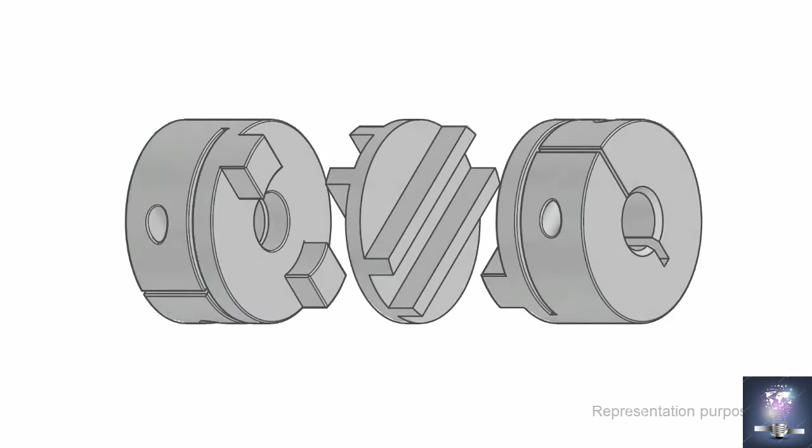In this video, I will make an Oldham coupling in AutoCAD 3D. This coupling is generally used for connecting two non-collinear shafts. So if two shafts are not collinear, but are parallel to each other, this coupling is generally used. Moving on to the 3D drawing, I'll start with a simple circle.

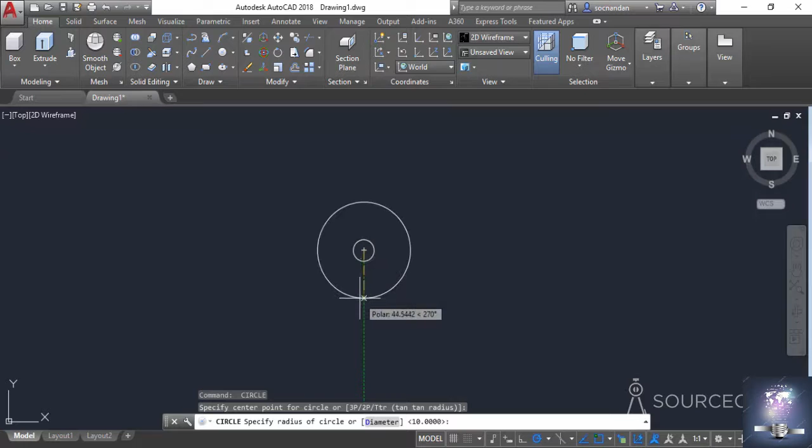Go to the draw panel and select the circle tool. Click anywhere in the drawing area to start the circle and enter the radius. I'll type 10 as the radius and press enter. Now press enter again to repeat the command, select the same center and make another circle with radius of 35 units, then press enter again.

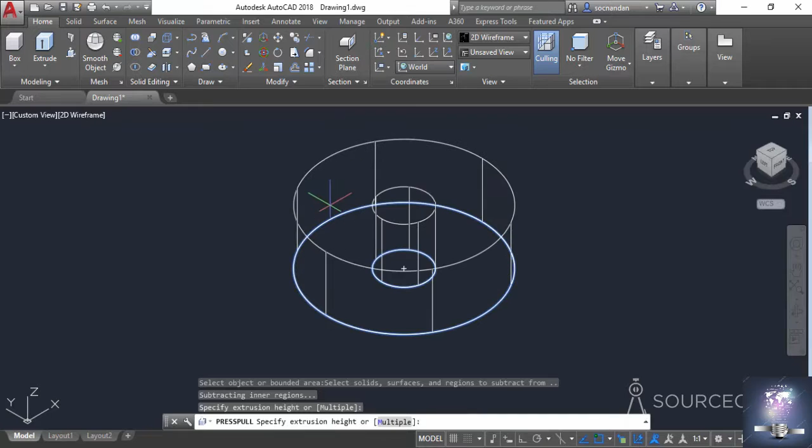Now I'll move to the 3D plane. For that, I'll click on this home icon close to the view cube, and go to the press pull tool on the modeling panel. Click in between these two concentric circles and enter a height of 36 units, then press enter.

Now press escape, and I'll change the visual style to see this more clearly. I'll go to the view panel, click on the drop down and select shades of gray. This will make it quite visible.

Now I'll go to the top view once again, zoom out and make a rectangle. I'll go to rectangle, click anywhere outside this 3D geometry, and type @ on the command line. Now enter the length of this rectangle, which is 16 in this case, comma width. I'll use a width or height of 80 units and press enter. So here we have it.

Now I'll click on this and move it exactly onto this 3D geometry. For that, I'll select the move tool and click on the geometric center. I'll track this point, then track this midpoint, click at this point, and move it onto the center of this geometry here.

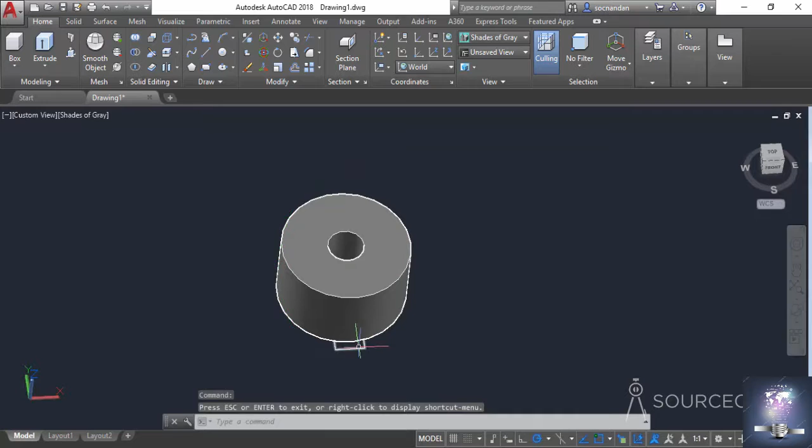Now let's orbit this drawing a little bit to see it clearly. Okay, so we have it here on the lower side. I'll click on it and move it upwards. Select the move tool, click on a point and move it upwards. Make sure this green tracking vector is visible, and when it is, enter a height of 36 units and press enter.

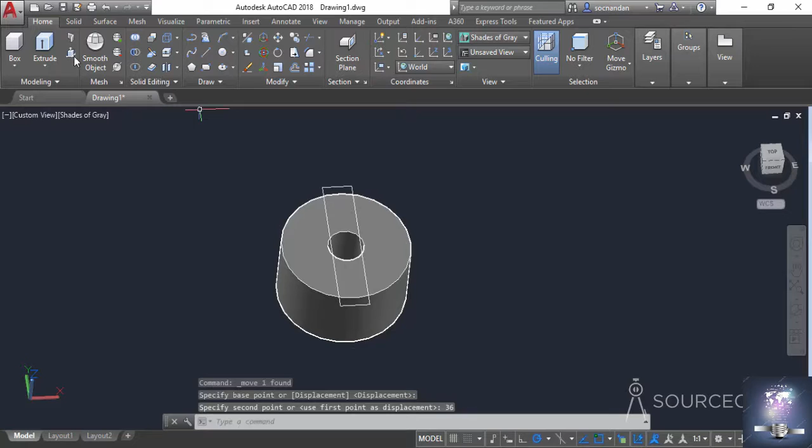Now go to the press pull tool again and select this area within this rectangle and the rest of the geometry. Enter a height of 10 units and press enter. Now repeat the process for this second part as well, enter 10 and press enter. Press enter again to exit the press pull tool.

Now I'll select the circle tool and click on this topmost center of the circle. Make another circle with radius of 20 units and press enter. Go to the extrude tool, select the circle you have made and press enter. The circle will extrude in the upward direction, but we want it in the downward direction, so type -10 and press enter. So here we have it.

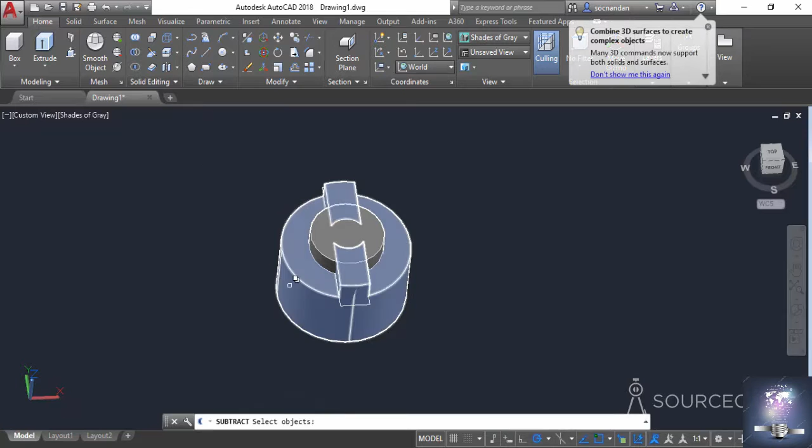Now we'll subtract this circle from the rest of the geometry. For that, I'll go to the subtract tool. Select this main geometry and press enter, then select this part and press enter again. And here we have it, the subtracted geometry as per our requirement.

Now we'll make another rectangle. I'll go to the rectangle tool, click anywhere in the drawing area, and type @ on the command line. Make it with a length of 70 units and a height of 80 units, then press enter. So here we have it.

Now click on this home icon and select the extrude tool. Select this rectangle, press enter, and enter a height of 1.6 units, then press enter.

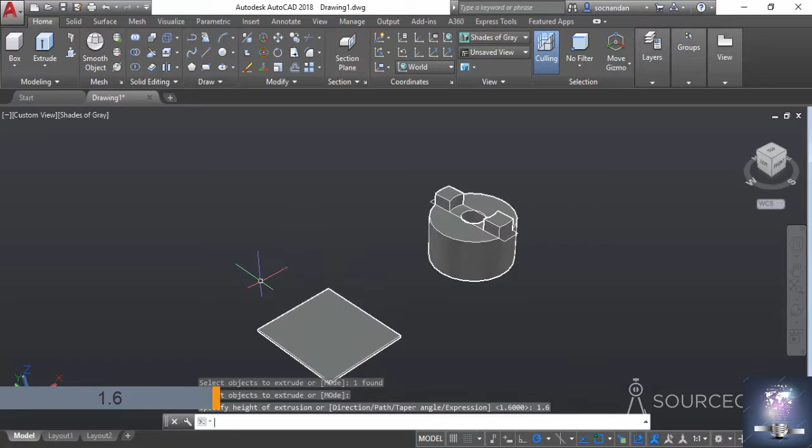Now we have this drawing in perspective view, which we don't want, so I'll change it to parallel by right clicking on the view cube. We'll move it upwards. I'll click on this front view and you'll see that this is currently on the bottom side of this geometry, but we want it on the upward side, so we'll move it a little bit upward.

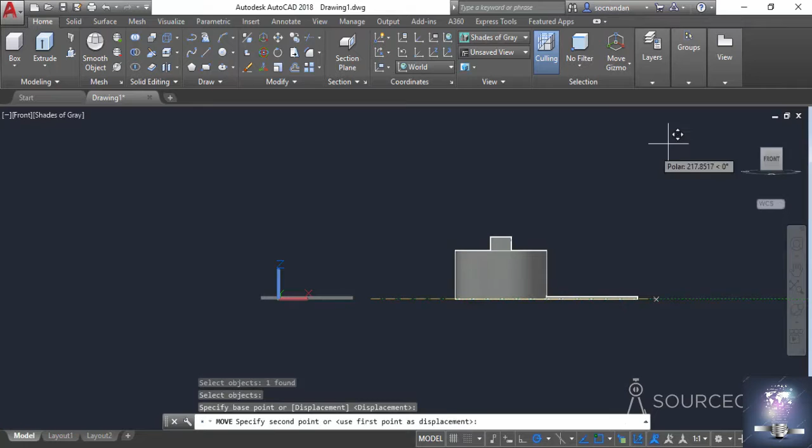For that, I'll select the move tool, select this rectangle, press enter, click on any point, and move it upwards, but we are not able to do that in this view. So I'll change the view by clicking on the home icon once again, and when the green tracking vector for the z-axis appears, enter the length, which is 26, and press enter.

Now once again click on this front view, and you can see that it has now moved upwards. I'll right click on the view cube and change it to parallel to see it more clearly.

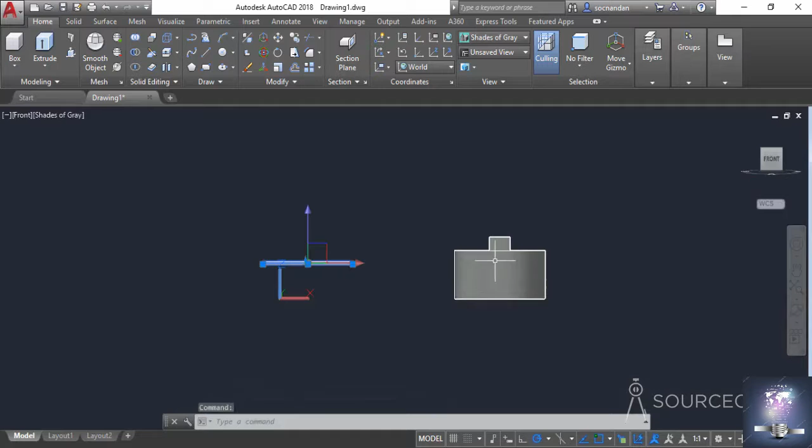Now we need to insert it inside this drawing. So select it, click on the move tool, click on this endpoint and move it so that it completely passes this center groove, and I'll click somewhere over here.

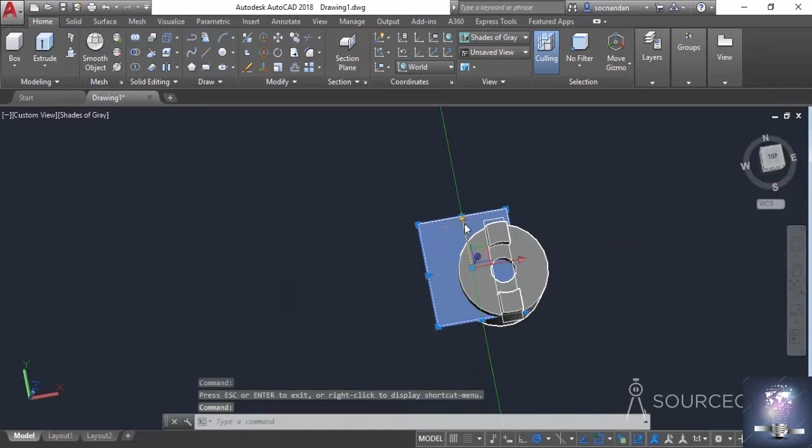Okay, now orbit the geometry, and we need to move this one a little bit towards the downward side. I'll select it, and using this gizmo I'll click on the green axis and move it a little bit downward. Now it is completely passing this cylinder. Now we can subtract the geometry.

I'll select the subtract tool, select the main cylinder, press enter, select the rectangular shape and press enter again. And here we have it. Okay, so one part is now complete. Now let's move to the other side of this shape.

So here we will add another groove. I'll click on the bottom view like this, and now I'll make another rectangle. For that I'll select the rectangle tool, click somewhere over here, and type 'at' on the command line, then enter a length of 70 units and a width of 1.6 units and press enter.

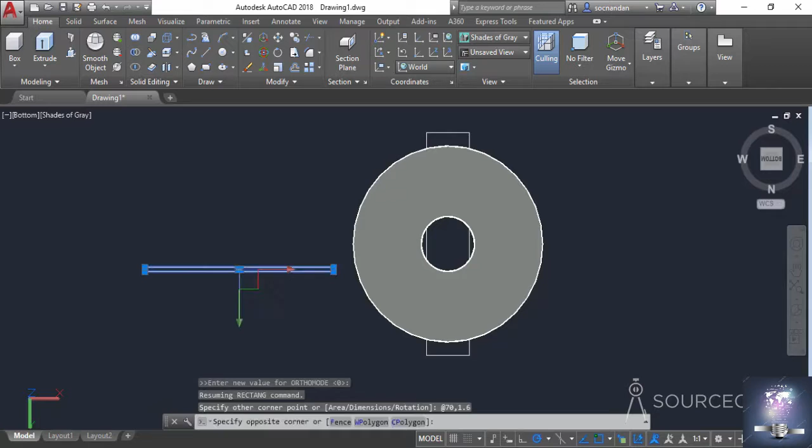Now I'll select this completely, select the move tool and move it to the center. So I'll click on this midpoint and move it to this center point. Now this is on top of this geometry, as you can see quite clearly.

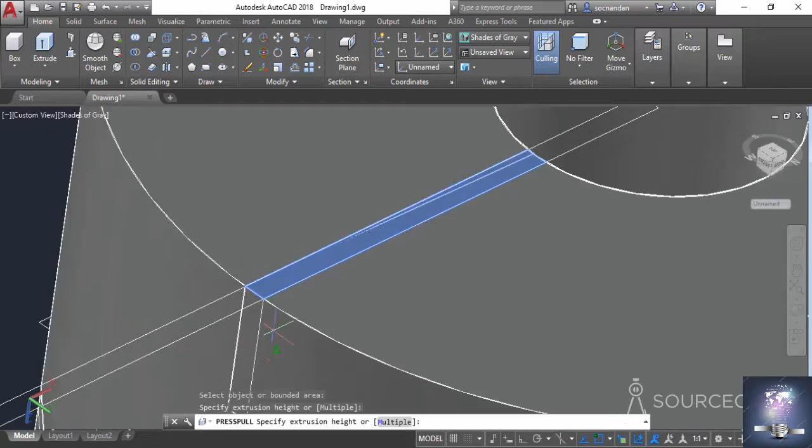Now select the press pull tool and click inside this groove, and move it in the downward direction and click on any point somewhere over here. You can click on this midpoint also, so that a groove is formed, and here we have it. The groove has been formed here.

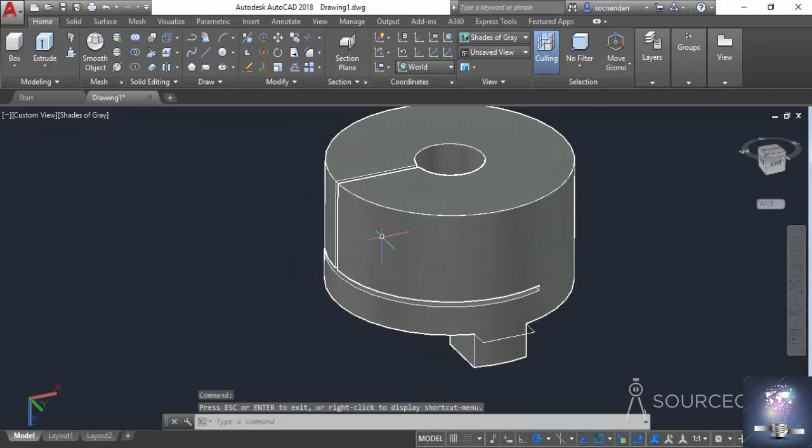Now you can remove this rectangle, it's no longer required. So we have our groove here as per our requirement. Now we need to add here the groove for our bolt.

I'll click on the back view, and here we need the bolt groove. So I'll click on the circle tool, but before that we need to change the UCS, as we are currently on the XZ plane on which we cannot make the drawing. I'll click on this coordinates panel and click on this flyout, select the view, and the coordinate will change to XY.

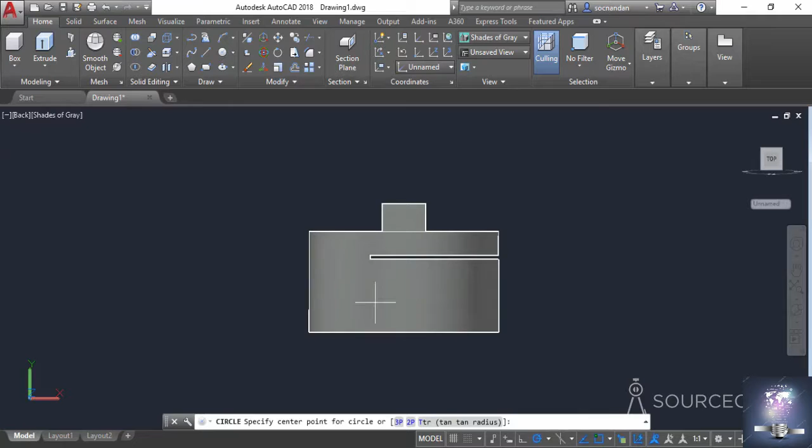Now click on circle, click somewhere over here, and make a circle with a radius of 4 units and press enter. So now the circle is not visible because it's made on another plane parallel to this one. I'll orbit this drawing, and here we have it.

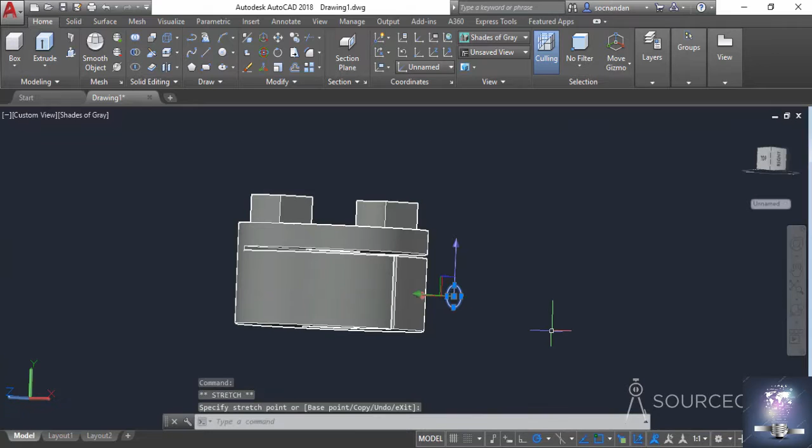So we need to move it. Just orbit the drawing a little bit. Now select the circle and, using this green grip, move it close to this geometry.

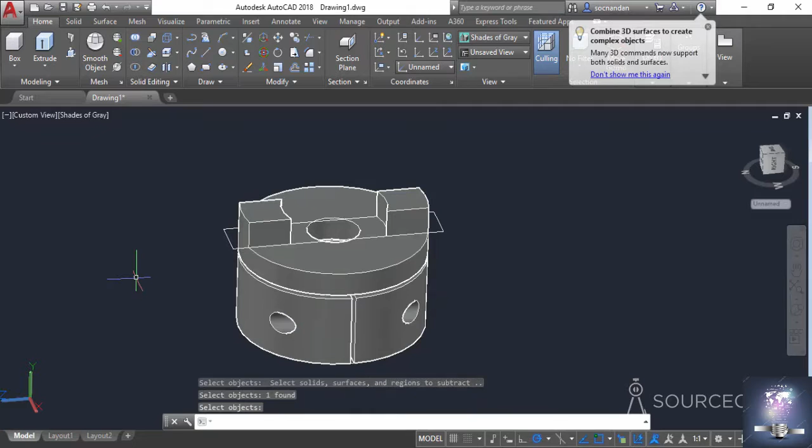Now we will go to this extrude tool, select the circle, press enter, and make a cylinder that completely passes through this geometry. Once again select the subtract tool, select the main geometry, press enter, select the cylinder, press enter again, and we have the required groove here.

So now we need to make another pair of this unit, but before that we'll add final details. The first detail we need to add is the chamfer on this side. For that I'll just remove this circle, this is no longer required.

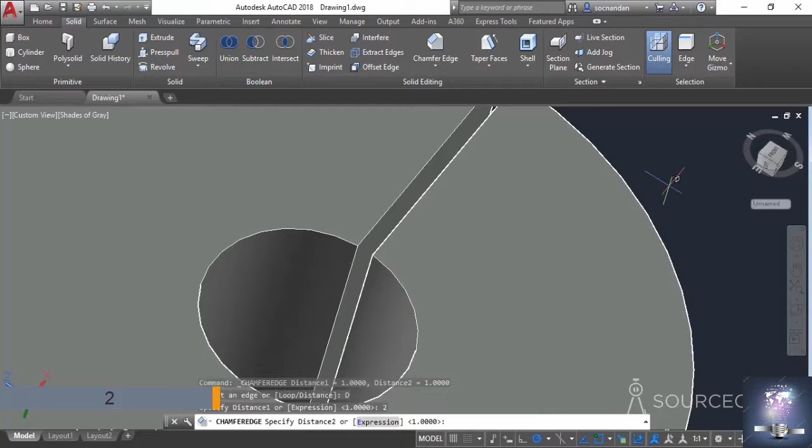Now go to Solid, and from this solid editing panel, select the chamfer tool. Click on distance and enter a distance of 2 units. Press enter and enter 2 units and press enter again. Now click on this corner and press enter. Okay, so here we have it.

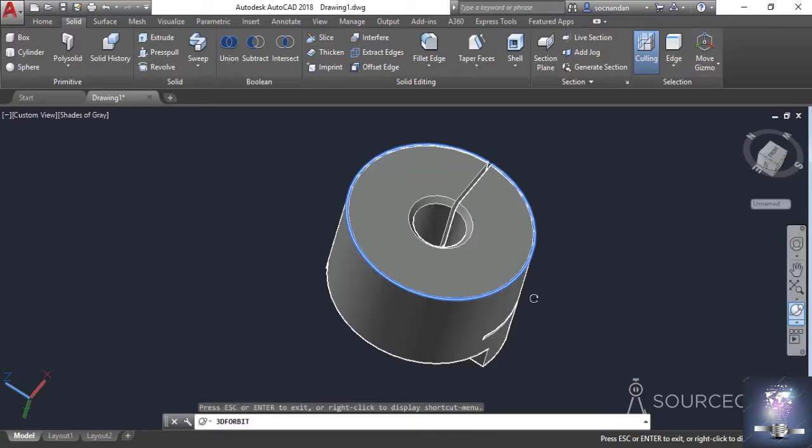Now we'll add fillets on the remaining sides. For that I'll once again click on this flyout, select fillet edge, click on radius and enter a radius of 0.6 units. Now click on this edge, and similarly keep clicking on the remaining edges of this 3D geometry. So now the fillets are added on almost all of these edges.

We will now make a mirror image of this. I'll go to Home tab and select this 3D mirror tool. Now select the object, press enter, and we'll select the plane. In this case we can see that the XZ plane is parallel to this geometry, so I'll select this XZ or ZX plane.

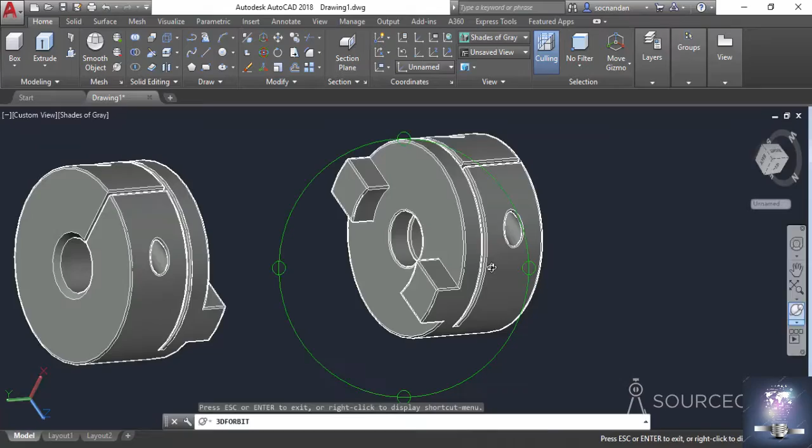Now simply click at a point. I'll click on any of these points. I'll go to this, take reference of that point, but not click, and click somewhere over here. Now press enter. So in this way we can make a mirror image of the original object like this.

Now we only need to make the central mating part of this coupling. For that, once again I'll go to the bottom view, which is currently set to front. I'll click on this world UCS icon so it gets converted to the bottom view, and now make another circle. Click at a point and make a circle with a radius of 35 units.

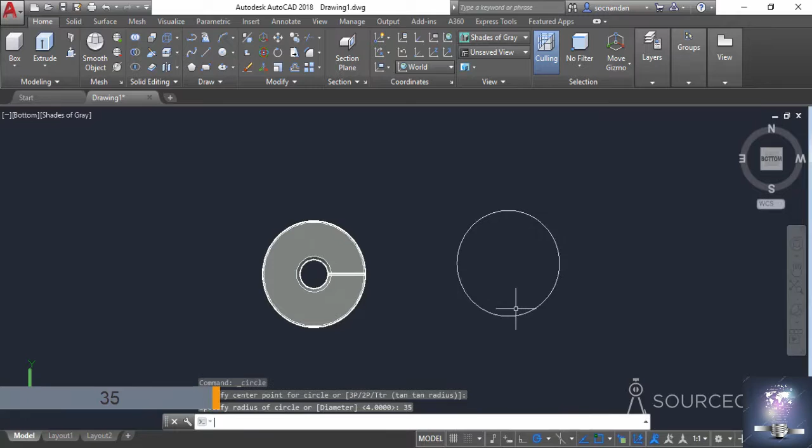Now go to the rectangle tool and make another rectangle somewhere outside this geometry with a length of 80 units. For that I'll type 'at 80' and a width of 16 units and press enter. So here we have it, the rectangle has been made.

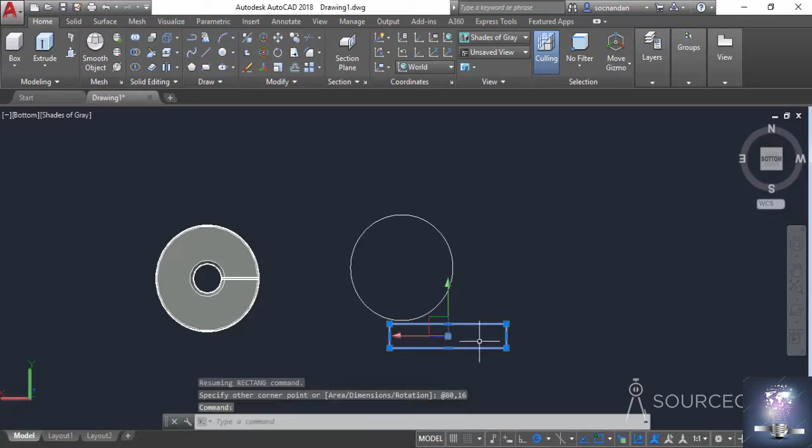Now we'll use this rectangle in a moment, so I'll place it over here. Let's orbit the drawing and convert it into 3D. I'll go to the extrude tool, select this circle, press enter, and enter a height of 6 units, then press enter.

Now let's move this rectangle onto this geometry. I'll select the move tool and click exactly at the center of this rectangle. I'll track this midpoint without clicking, then track this midpoint and click at this intersection point. Now move it to the center of this, clicking on any of these centers. So here we have it.

Now we'll make an offset of this. I'll select the offset tool, enter an offset distance of 6 units, and press enter. Now click on this rectangle and click outside. Here we have the offset.

Now we need to rotate this one. I'll select both of them, select the rotate command, click on the center of this cylinder, and click on this copy option from the command line to make a copy, entering 90 as the rotation angle. Here we have it. Now let's move it onto the second plane.

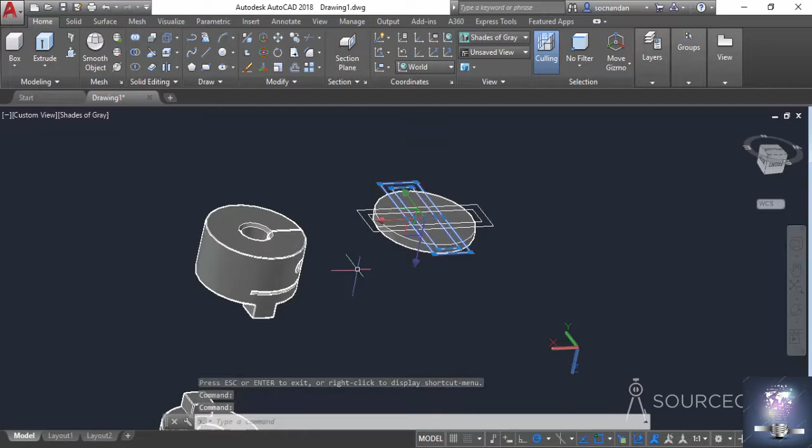I'll select both of these rectangles, select the move tool, click on this vertex, move it downwards, enter a distance of 6 units, and press enter. So now they are on completely different planes.

Okay, let's add the remaining 3D geometries. I'll go to the press pull tool, zoom into this area, click in between these two parallel lines, and enter a height of 10 units and press enter. Repeat the process for this side with the same height of 10 units and press enter.

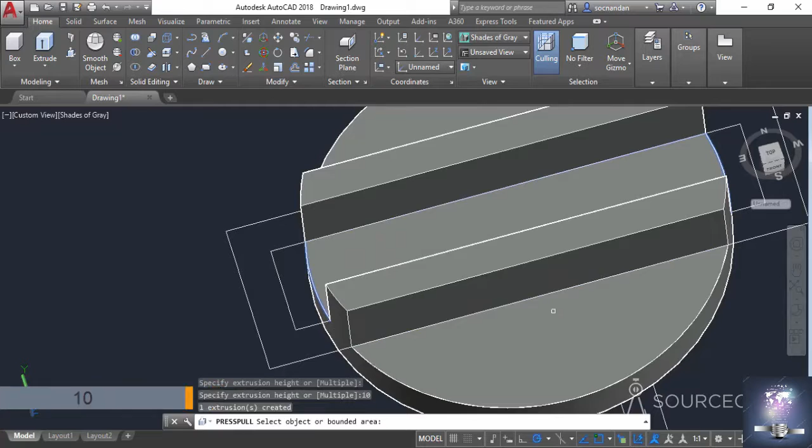Now orbit this drawing completely to the second side, and repeat the process here also. I'll go to the press pull tool, click in between these two points, enter a height of 10, click in between these two points, enter a height of 10, and press enter.

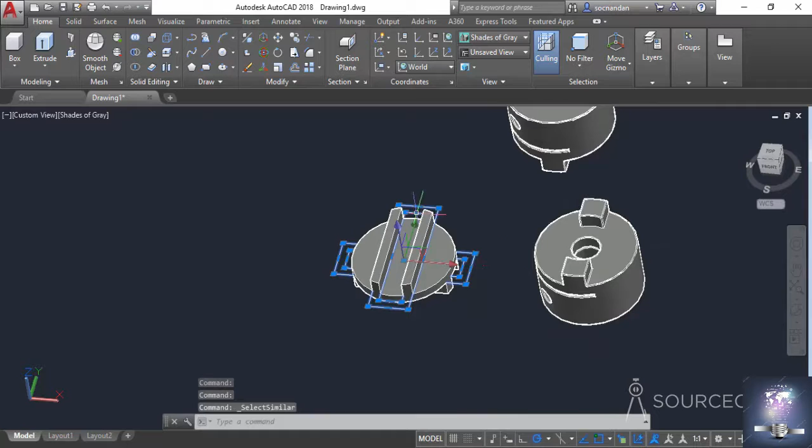Now we have this geometry almost complete. We only need to remove some of these 2D objects which aren't required. I'll select both of them and right click. I'll select the select similar option, which selects all of these polylines and also some polylines present here, and now select erase.

Okay, we also need to rotate this one. So I'll select this object and rotate it 90 degrees. Select it and click on this rotate gizmo, which will appear. Click on this blue axis, type an angle of 90 degrees, and press enter. So this has also been rotated.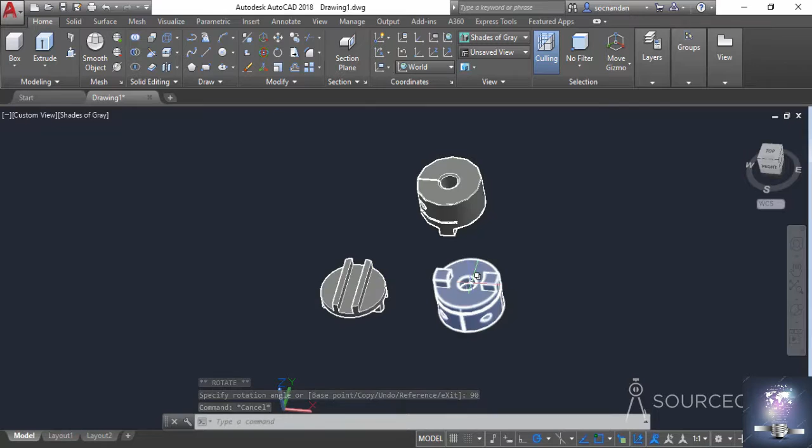Now we simply need to move it onto this geometry. I'll select it, click on the move tool, click on any of these midpoints or the center point, go to this center point, track it, and click somewhere over here. And here we have it, the final Oldham coupling with all of its mating parts.

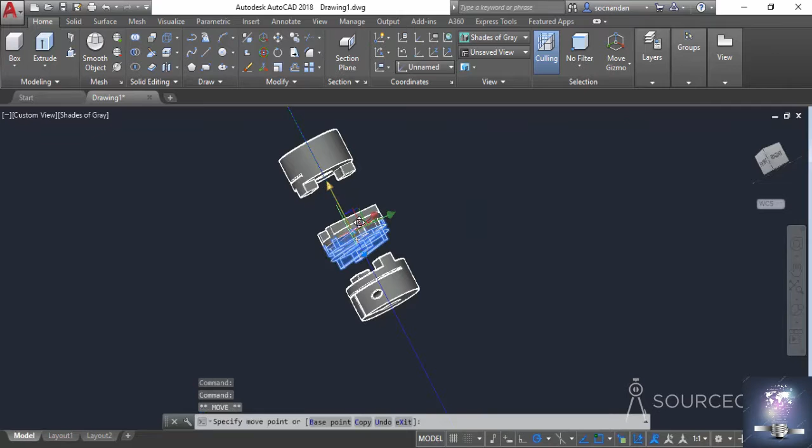So if you want, you can move it even further using these gizmos, just like this. And here it is. So we have the Oldham coupling, and they are now mating perfectly.

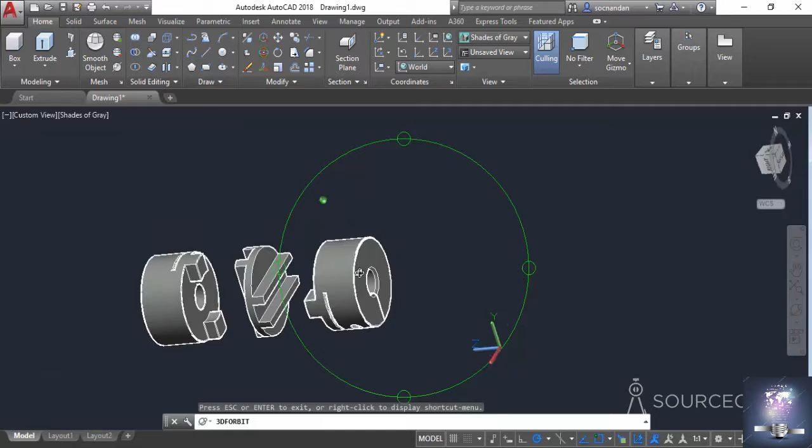So this part will mate with this, and this part will mate here. And a shaft will be connected here and another shaft will be connected here. There is only one thing that remains, which is a keyway, which you can make here.

So if you want to add that keyway, it's quite simple. You can simply add one here. I'll make a rectangle here for that. Let's type a length of 20 units and a width of 4 units and press enter. So here we have it.

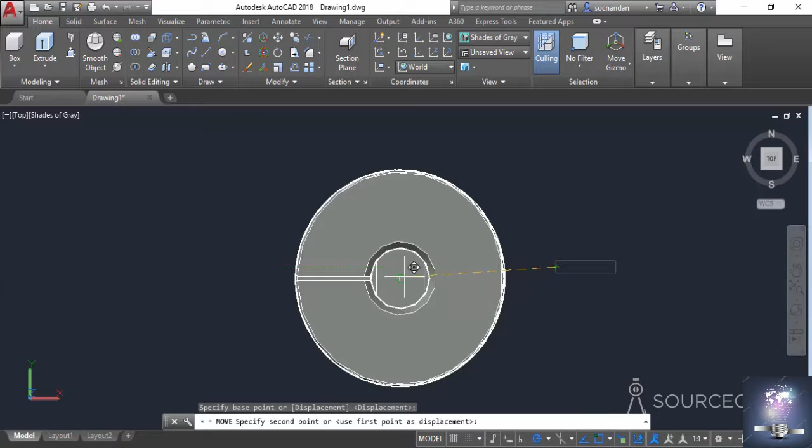Now let's select it, select the move tool, click on this midpoint, and move it onto any of these center points. Obviously the rectangle will be lost somewhere, and here it is. So I'll select it and move it upwards.

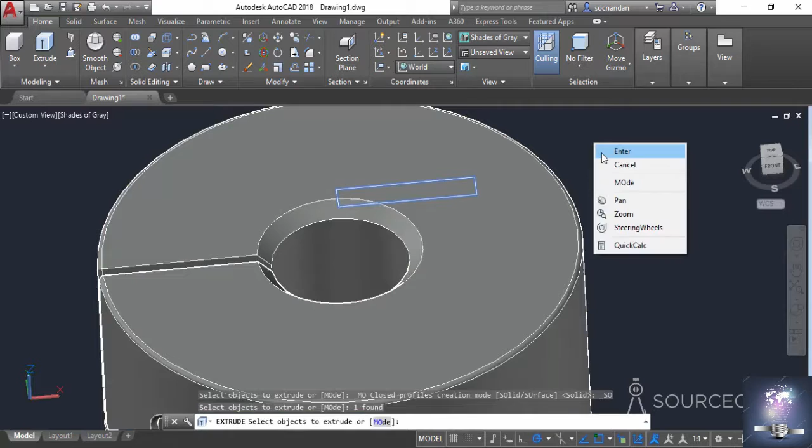Now I'll select the extrude tool, click on the rectangle, and extrude it to a certain height. In this case I'm approximating its height, so I'll click somewhere close to this point, and I'll turn off this object snap, and here it is.

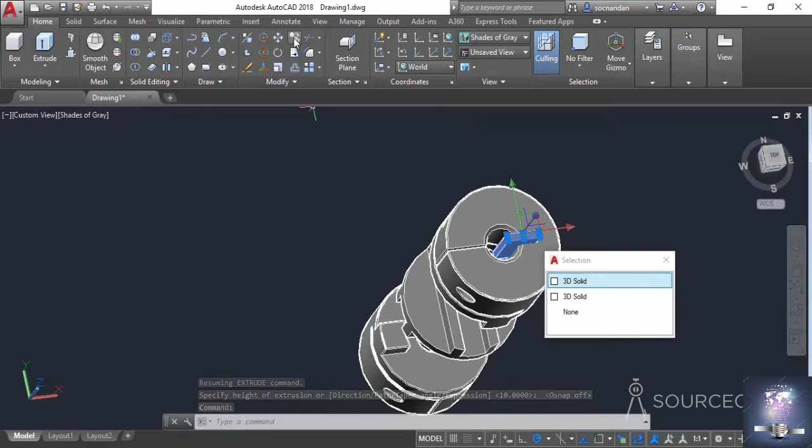Now we just need to subtract it, and before subtracting I'll make a copy of this. I'll select this object, make a copy of it, and move it to another side of this geometry, moving it somewhere over here. Okay, and here we have it, so it has been added here also.

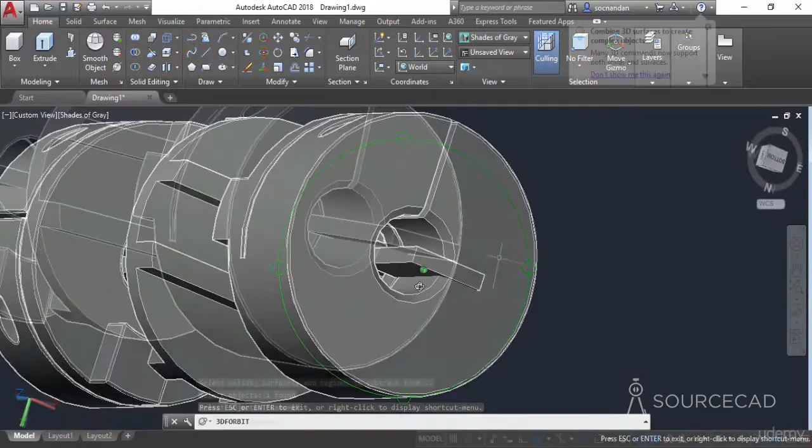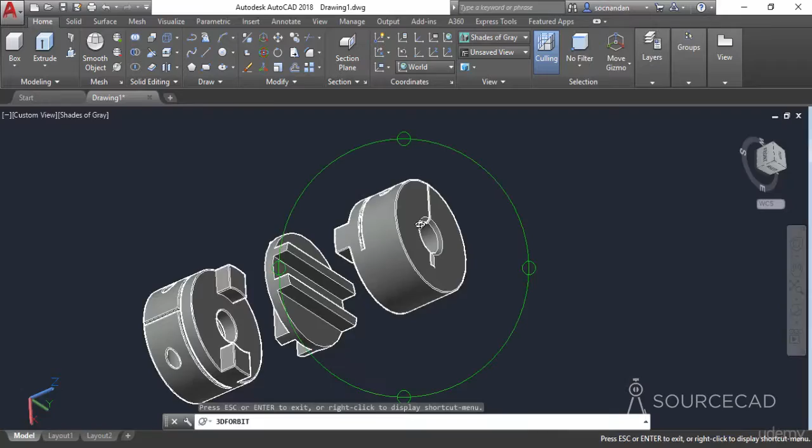Now I'll select the subtract tool, select this geometry, press enter, select the second part, which is this 3D solid, and press enter again, and it has been subtracted here just like this. Similarly we can do it for this side as well: select the subtract tool, select the main geometry, press enter, select the second part, press enter again. So now we have this final Oldham coupling here in AutoCAD 3D.